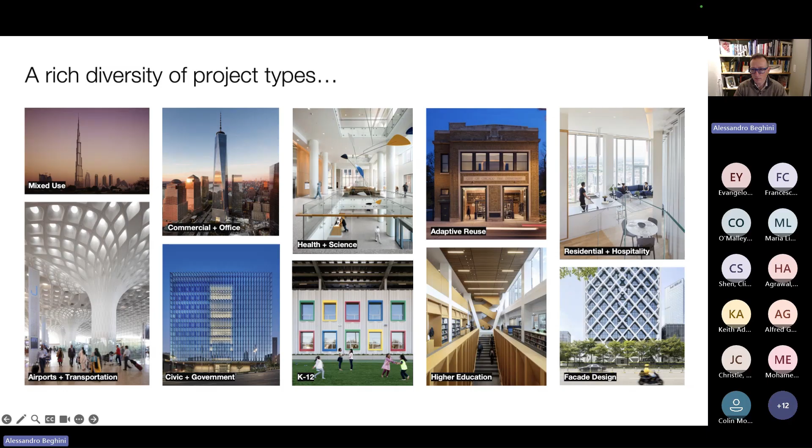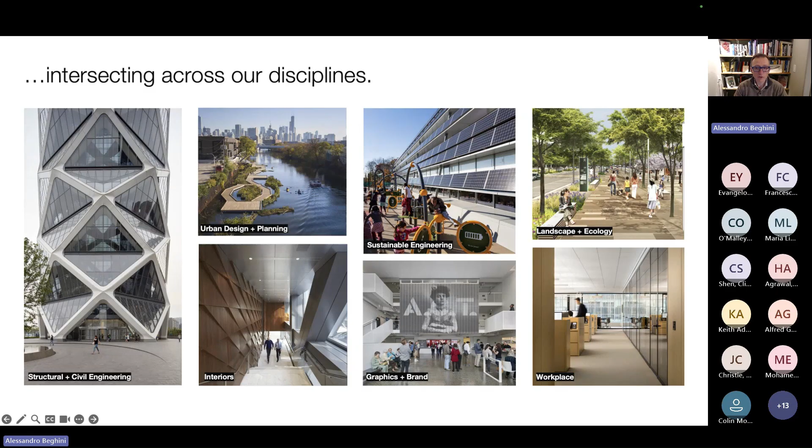Our portfolio covers a variety of types. You could be working on a very large airport, like this picture of the Mumbai airport, or on courthouses like in Los Angeles, or renovation projects. So really a variety of projects, as well as a lot of different experiences from the different disciplines under the same roof, including structural engineering, which is my department, and then architecture, sustainable design, and graphics.

So just taking into account the lens of our approach to design, let's dive into the project I'm focusing on today, which is the Los Angeles County Museum of Art.

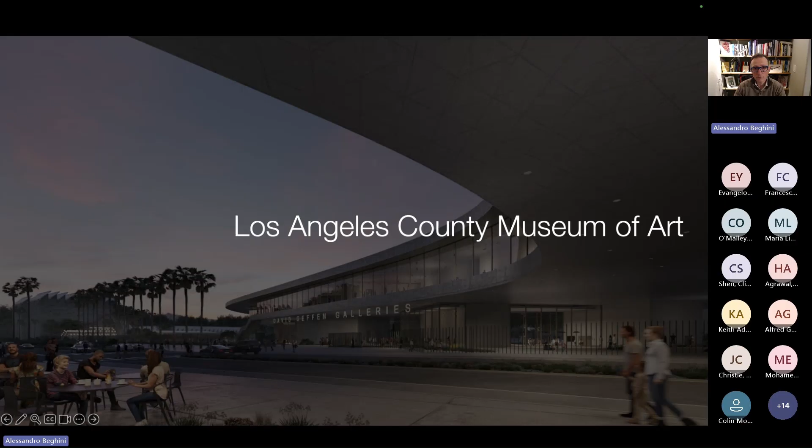So this is a picture of the upcoming building within the context of the LACMA campus. It has actually been many years in the making. I was mentioning earlier about 10 years we have been working on this project, and it is just one of the latest additions to a number of new structures that were added over the years.

You can see them here scattered on the campus. There's the Resnick Pavilion, designed by Renzo Piano, and then the one that is spherical in form, which is the Academy Museum of Motion Pictures. And you can see the LACMA building for the permanent collection is at the center with that amorphous shape.

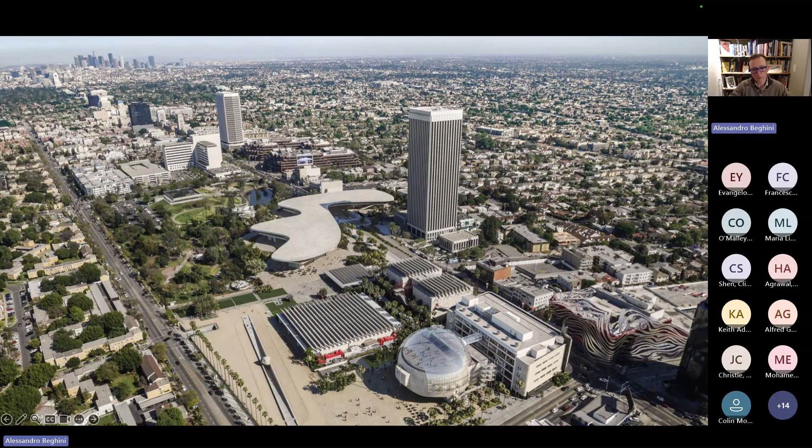If you go back a few years to 2006, this is what the LACMA campus looked like back then.

There were a few pre-existing buildings which were demolished prior to the starting of construction. Essentially, what the building I showed you in the previous picture occupies is the area in blue, in addition to crossing the street, Wilshire Boulevard, which is a major artery in the city of LA. So it crosses that street on the south and goes into a portion of what was previously a parking lot.

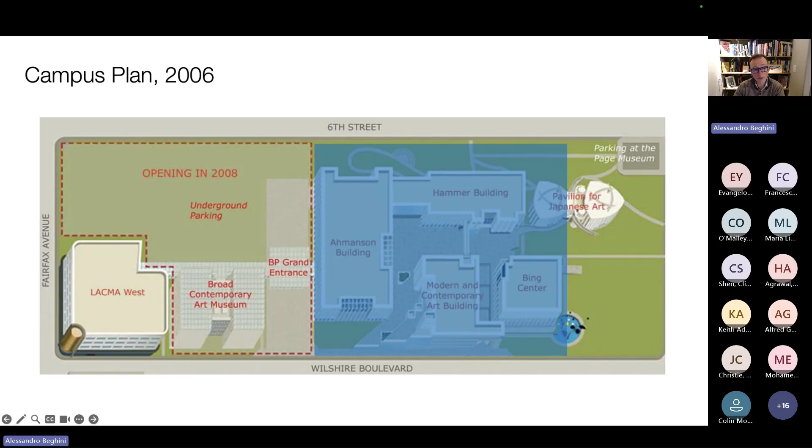The original complex included four buildings that had multiple functions back then, but that became a bit obsolete and weren't really useful for the museum, and that's the reason why they decided to move on with this new building for the permanent collection. The project really started with the search for the architect, and Pritzker Prize winner Peter Zumthor was selected as the design architect for the project.

So maybe a few words about Peter Zumthor and his approach to design. First of all, a few major notable projects by Peter here, and his design philosophy really centers on creating deeply sensory, atmospheric, and emotional spaces that connect with their specific places. He's literally looking at the materials, the history of the place where he's designing. He wants to emphasize the experience, and there's also a lot of attention to craftsmanship and honesty of material.

So it's a very interesting perspective, and he really believes that architecture should engage all the senses, using textures, light, sound, creating this holistic experience. And the design process itself took about 5 to 6 years before we could actually start the construction.

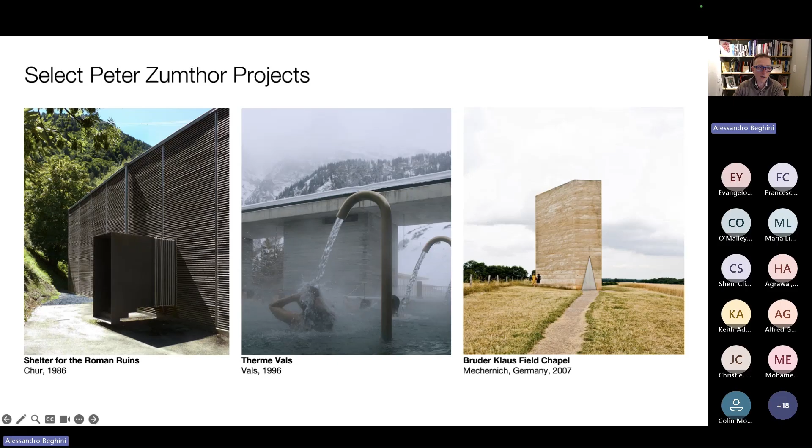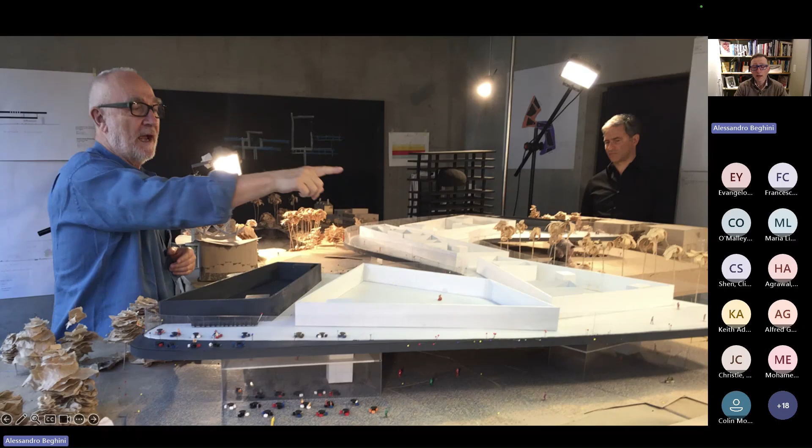So it was a very meticulous process, and it was really interesting working with him because the approach itself is very much rooted in physical models. There's a lot of work with paper. And so the use of physical models and paper allows for a very deep focus and also interesting spatial explorations.

Because when you're in front of a model, you can see very clearly if there are opportunities for something that you may not be able to capture when you're looking at just a digital model through your screen. And this is just a picture of Peter in his studio where he places the models, very large scale models, on top of stilts so that they're actually at eye level, so you can see them from the point of view of an observer who would be experiencing the museum when constructed.

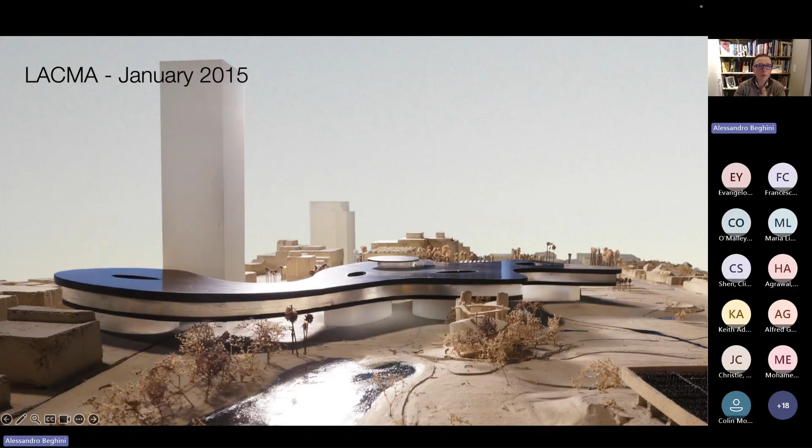The design process went through a series of iterations. This is one of the first models we worked on, and you can immediately distinguish a few important features of the design. The design concept features this elevated single-level art space, which sits atop the porous ground floor, and therefore eliminates any hierarchy in the visitor experience, which is different from more traditional multi-story museums and from what the older buildings that were there for LACMA were.

Essentially, when you typically visit a museum, you could go and visit, say, the Impressionist painting, so you go to the Impressionist room, and then you want to see Japanese pottery. You may need to go, maybe the Impressionist is on the 10th floor, need to go down to the ground level, go to a different building, go back up another building. This automatically sets a hierarchy because usually what's on the ground floor of a museum is what's most visited, because it's most accessible, right? People will go there.

But here, by placing everything on the same level, there is no more that hierarchy, and you can easily access, once you go up on that single level, all the collections and all the pieces and all the exhibitions at the same time. So it's a very interesting approach to the experience of the museum.

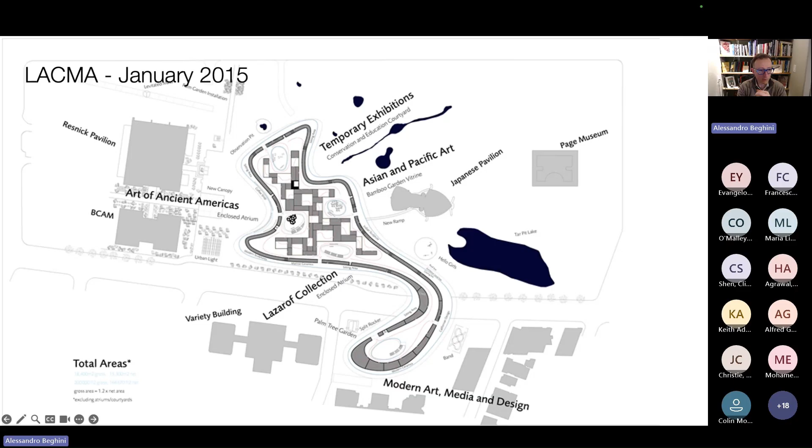This is a plan view of that same concept, with a series of boxes that are clustered around the center. Another important feature of the design is that the building spans across Wilshire Boulevard, as I was saying earlier. Wilshire Boulevard, on the south side of this building, is really a major roadway in LA. What that does is make the building partly a building, but partly also a bridge, because you're spanning this major road.

So, as I was saying, we just saw one of the first iterations. There were several iterations after that. For example, here is the iteration after one year, and you can already see the quality of the plan is very different from the first one. Now those boxes, those towers that support the main exhibition level, are very different—they're polygonal, first of all, and they're more scattered in the plan. It's a very organic nature that is developing.

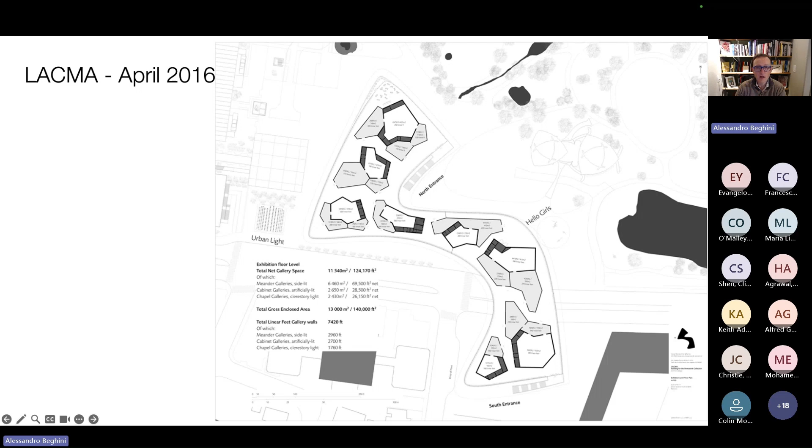Looking at the same scheme in elevation, you can see what we call art houses—these are the buildings that essentially protrude through the exhibition level, which is the one elevated, and they house the vertical transportation elements: elevators, stairs, mechanical shafts. The building itself, with the exhibition level and the roof, has components spanning between these art towers or cantilevering off them, in addition to the bridge spanning across Wilshire Boulevard. So iteration started in 2015, then we moved on in 2016.

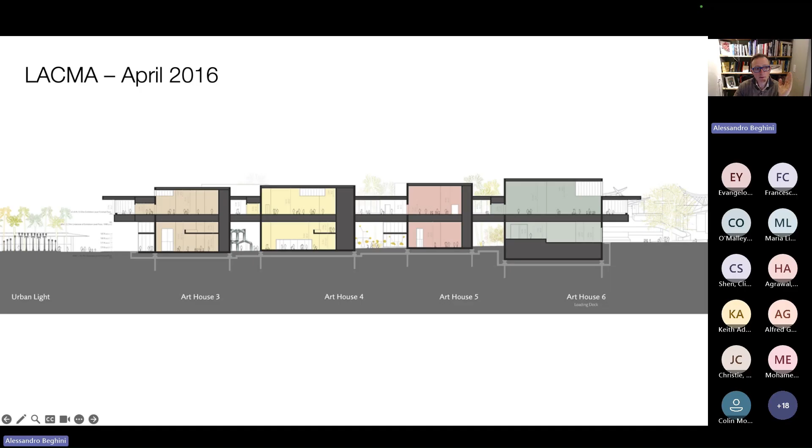Let's look at the next iteration—this is the last one. There were some other iterations in between, just to give you a flavor of the iterative process and refinement we went through for the design. This iteration is from the summer of 2018, where you can see that from the polygonal shapes, now we are in rectangular shapes—a more refined form of the perimeter, the edge of the exhibition floor.

What you can also see is that not only do we have what we call art houses, the main towers that go down to the ground, but also scattered throughout there is a series of what we call chapel galleries. Let me go to the next one, it'll become more clear. Essentially the towers, the boxes that actually reach the ground, are the ones filled in here, and they're color-coded by what we call neighborhoods.

Connected to them is a series of boxes which are not filled—again, different colors, but connected back to the main towers. The purpose of these empty boxes is to stiffen the sandwich of the exhibition floor and the roof, to make sure that, given the long spans we're having here, we can control the deflection and design for strength. Purple is a neighborhood, cyan is a different neighborhood, yellow is a different neighborhood, and so on.

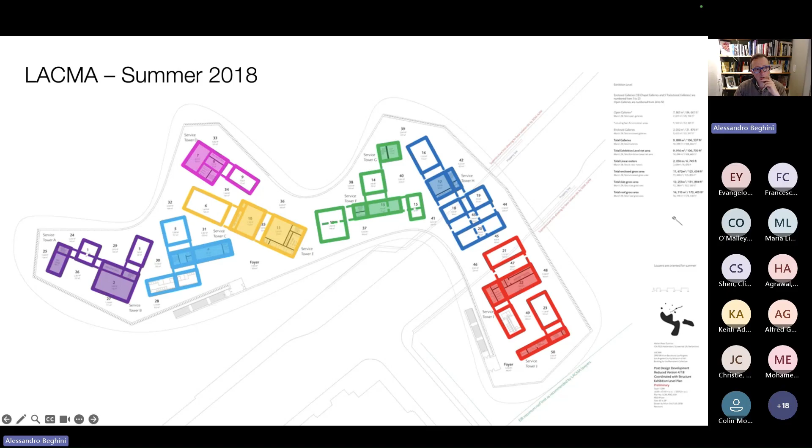So, given these architectural iterations, in parallel there were several structural iterations that came with them. This is a very simple, early structural section, but it's still very powerful because it really explains the fundamentals behind the concept of the structural system.

What you can see here is that we have these reinforced concrete towers, made up of reinforced concrete shear walls that represent the primary lateral system for the project. The towers come down and sit on top of isolators at the very bottom, which provide the building's seismic isolation. We'll talk a little bit about seismic isolation in a few minutes.

Obviously, as you can imagine, we are in Los Angeles, very high seismicity, and we are talking about a museum, so important, invaluable content inside. To protect it, we made the decision to go down the route of seismic isolation.

The tower with the shear walls represents the lateral system, and the gravity system uses post-tension reinforced concrete to support those very long cantilevers projecting from the towers. So we have these conditions spanning across multiple towers and then the bridge across Wilshire Boulevard.

The floor sandwich itself, or the roof system, is composed of a top and bottom slab connected by vertical reinforced concrete ribs essentially. So the sandwich itself is very deep and provides enough stiffness.

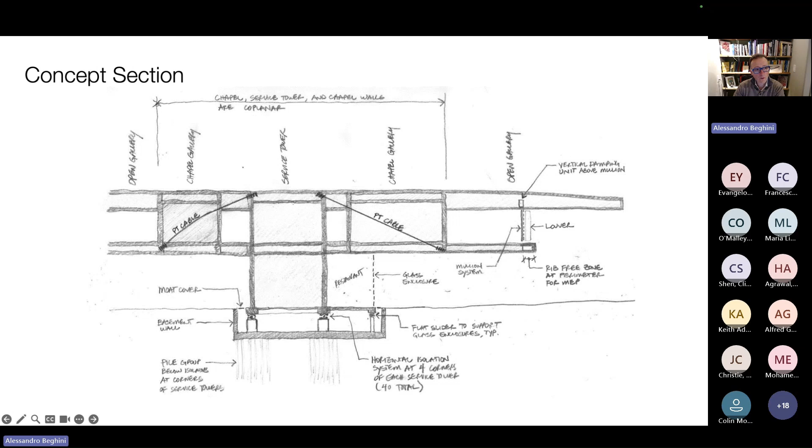This is another image of the final plan geometry of the building, which ended up, from a structural point of view, being a two-way system of interconnected ribs.

What you see in this diagonal pattern is all the ribs connecting all the way across the plan, which is a very large structure. Scale-wise, each of those diamonds is about 8 to 10 meters in dimension, and overall the length of the building is about 200 or so meters. So very long, with cantilevers that in some of the worst conditions could be up to 30 meters, which is very significant and obviously requires this very robust structural system.

You can see also that this two-way grid of diagonal ribs covers the entire plan and is coordinated with the geometry of the towers and the chapel gallery. So everything is working together geometrically to create and support the architectural vision.

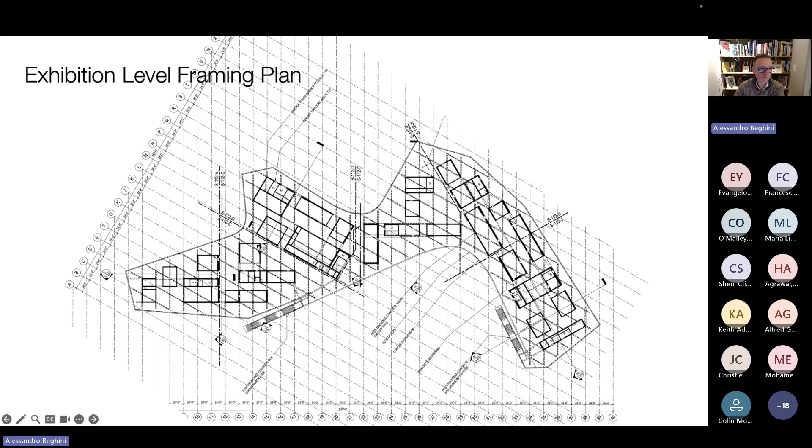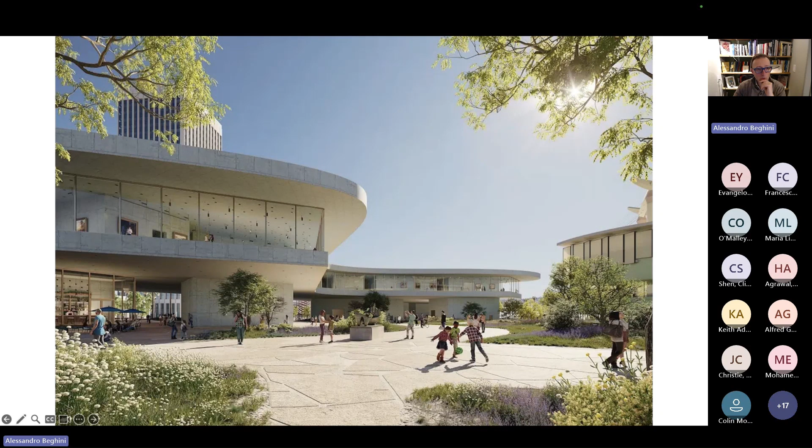Let's take a look at, obviously, I want to mostly focus on some of the structural aspects of the project. There's a lot in the architectural discussion that could be said, but let's focus more on the structural aspects. There are three big chapters from a structural point of view we can talk about today: first, the post-tensioning and the gravity system; second, the lateral system and base isolation; and third, I'll show you some of the most meaningful construction phases and sequencing for the project.

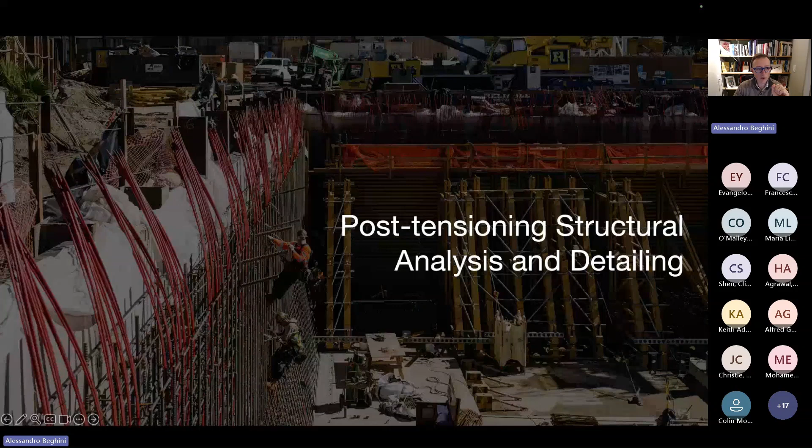So the first step, looking at the post-tensioning that was used in the project for the gravity system—this is just a picture from our analysis model.

We used LUSAS as a software to analyze the post-tensioning. We actually had two primary structural models. The LUSAS model was used for the gravity system and the analysis of the gravity system, and then we had an ETABS model, a completely separate one, which was used primarily to do the lateral system analysis.

In the LUSAS models, in order to do analysis of post-tensioning, you need to account for a number of factors. In particular, when you deal with concrete, what you're concerned about often with long cantilevers is really long-term deflections. So you need to be able to simulate creep, shrinkage, pre-stress losses, and a number of other phenomena that occur when you're dealing with PT.

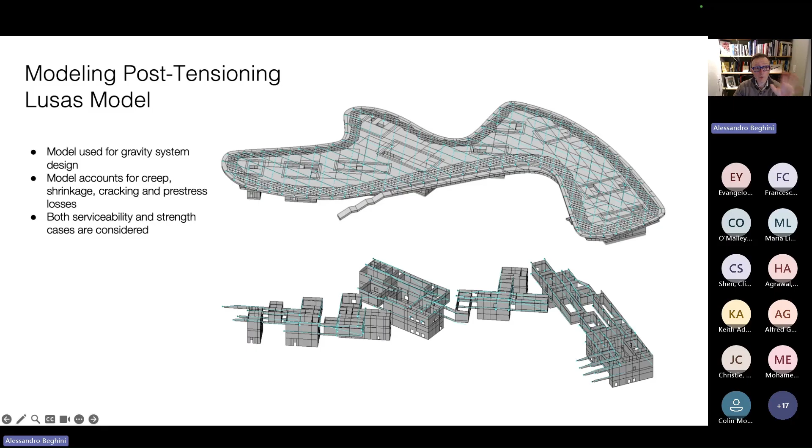If we want to break down the PT system a little bit more, this section is helpful in understanding how the whole system works. First of all, an important aspect of the structural system is the extensive use of the balanced or double cantilevers, where essentially whenever you have a cantilever on one side of a tower, we try to balance it with a cantilever of similar length on the opposite side. So that when you have a balanced cantilever, you just don't have a net moment that is going into the tower and causing a net moment at the base of the tower itself.

Not only that, but the post-tensioning cable bundles are introduced inside the shear walls. You can see here those black lines are essentially post-tensioning cables. So we have the post-tensioning cables inside the shear walls to counteract gravity forces. These post-tensioning cables are laid out according to the principal stress directions inside the wall. So an analysis is conducted to understand what the natural flow of forces will be inside the walls, and then you would follow that natural path in order to lay out your cable inside the wall.

As you can see, there's also post-tensioning cables that stay high, either high in the roof sandwich or high below in the exhibition floor sandwich, and those are there to support the cantilevers and the long spans within the building itself. So there is a clear hierarchy, and that hierarchy is really organized.

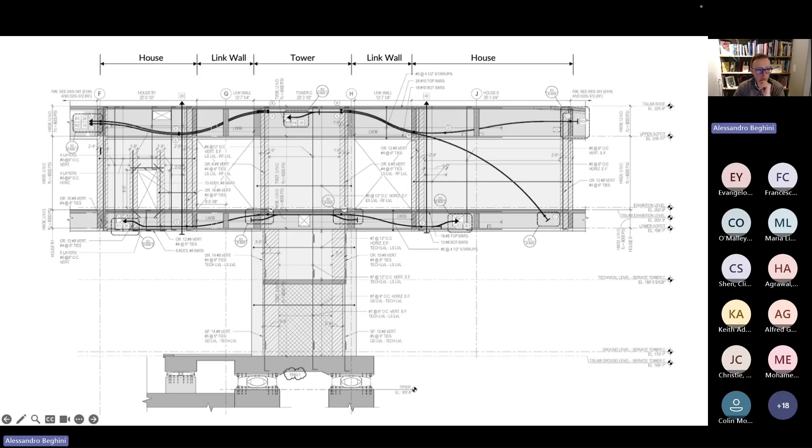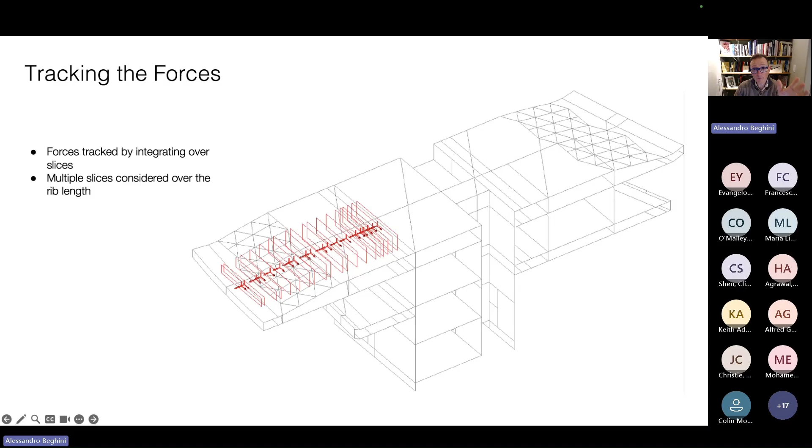Now, how do we design the PT? Well, we take our LUSAS model, and what we do is really set up a series of sections. For example, say that you need to design a rib within the sandwich of the roof - you would set up these red planes, a series of cross sections that you integrate along the beam, which would allow you to know what the forces are at each point, say every meter or 2 meters along that beam. Then you would extract them and design them as part of a bigger process or script that allows you to take every single one of them and process them.

As I said, one of the key aspects in the design has always been, from the very beginning, the long-term deflections. This is just a contour plot that shows you a heat map of deflections within the building, extracted again from that LUSAS software.

When we look at long-term deflections, we are looking mostly at the deflections that are caused by the self-weight of the structure, together with the sustained loads - what we call sustained dead loads, which are superimposed dead loads on the building - and whatever would factor in and should be considered for this long-term view of the project. Obviously you're looking at a very long span, so for example this is 3,000 days, very far in the future, and needs to account for creep and shrinkage.

You can see here that the highest cantilevers, shown in red, have the highest deflection, located at the bridge across Wilshire Boulevard where the cantilevers are longest. In particular, there's a couple of spots on the south side of the building showing 2.33 or 1.93 inches, in the order of 60 to 70 millimeters, at the longest cantilever and the bridge. Those immediately became the hotspots we had to pay close attention to in order to mitigate the long-term deflection.

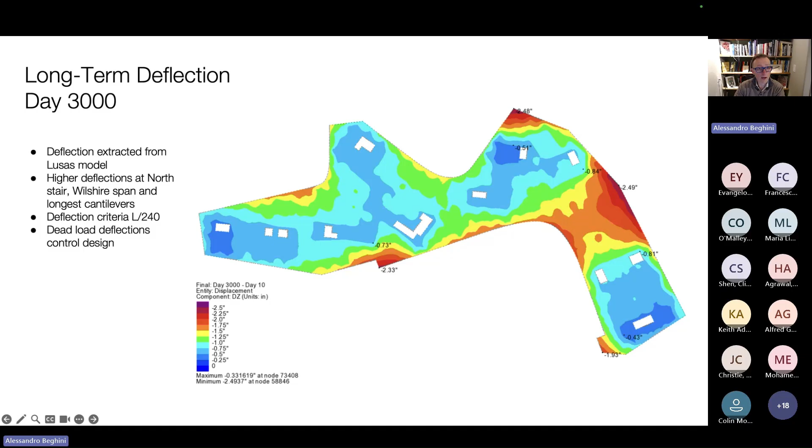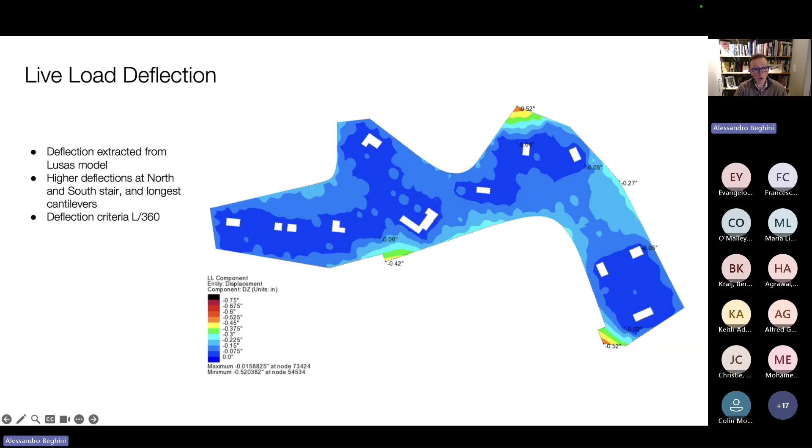In addition to monitoring the long-term deflections, we also looked at immediate elastic deflections. Those have more to do with live load deflections, which come from occupancy—people occupying the building, visitors experiencing the building. But those loads are typically not sustained, meaning they're short term, because they're not always there and not always imposing a load on the building. Also, those live loads are much smaller. So really the biggest component of load here is coming from the self weight and whatever art content is inside the building.

When we look at deflections, the absolute deflection—those 60 to 70 millimeters I mentioned earlier—is not the only thing we look at. We need to also think about the systems that go into the building, for example the exterior wall system, the glazing that we saw in those interior renderings. The glazing itself is sitting at the edge of the exhibition floor.

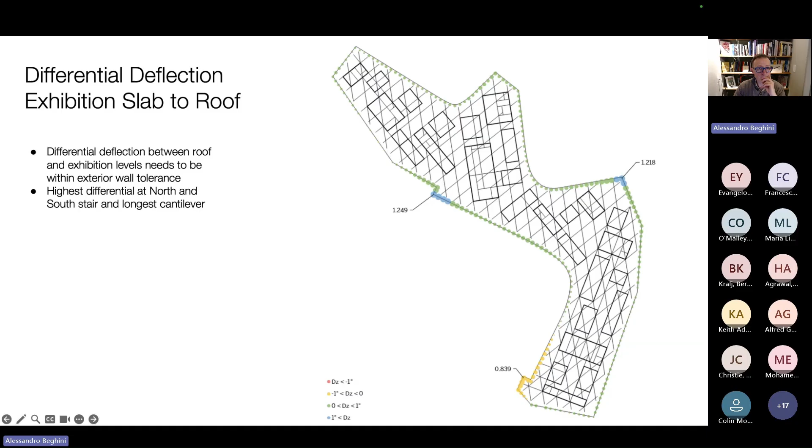For the deflection, in order to compensate for the large deflection, we introduced camber. The camber program essentially means that instead of building the slab or the ribs flat, you build them a little higher, so that over time it flattens. So the maps we saw earlier, the heat map which had deflection up to 60, 70 millimeters—eventually, if you build a little bit higher, it slowly comes down over time and becomes flat.

We produced maps that could be used by the contractor for a series of points which we agreed upon. We agreed that at any one of these points, as you can see in this bubble plot, a bigger bubble is a bigger camber, and we provided the contractor a camber ranging from 3 millimeters to 20 millimeters. So essentially, everywhere the formwork was at a different elevation by a few millimeters, so that when they cast it, it would be cast at this higher elevation, and then over time it would come down.

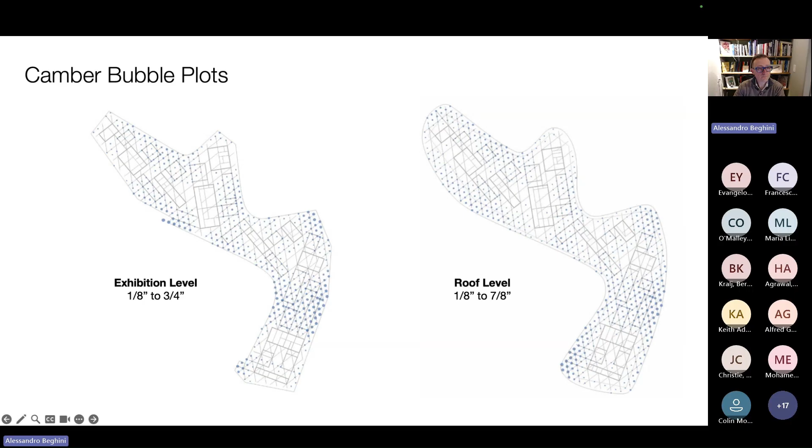For the bottom slab, you see the soffit, and in that cavity is where all the mechanical equipment and other MEP services will run. So it was very close collaboration with MEP consultants—the mechanical engineer, electrical engineer, and plumbing engineer—in order to make sure that everything could fit.

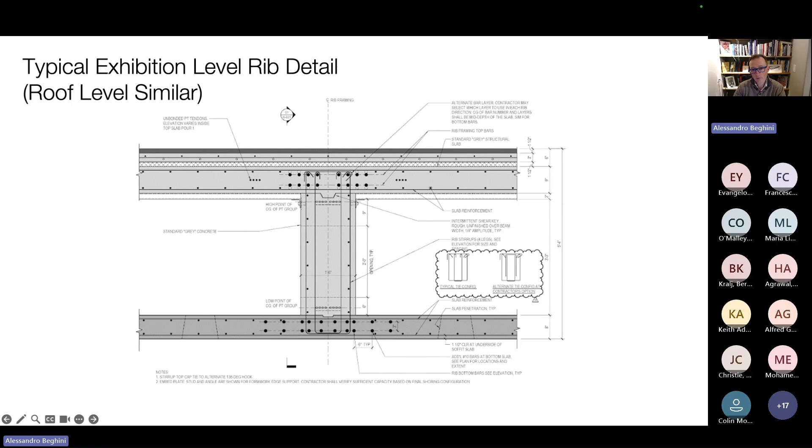Not only that, but once you start running services within this cavity, you also need to make sure that you have openings in the ribs. We saw in the plan earlier that we have these ribs running on a diagonal pattern, covering the entire floor plan, so we needed to make sure these openings were properly coordinated and detailed. All these black lines represent the proper detailing with trim bars and strengthening of the corners of the opening, making sure everything is accounted for.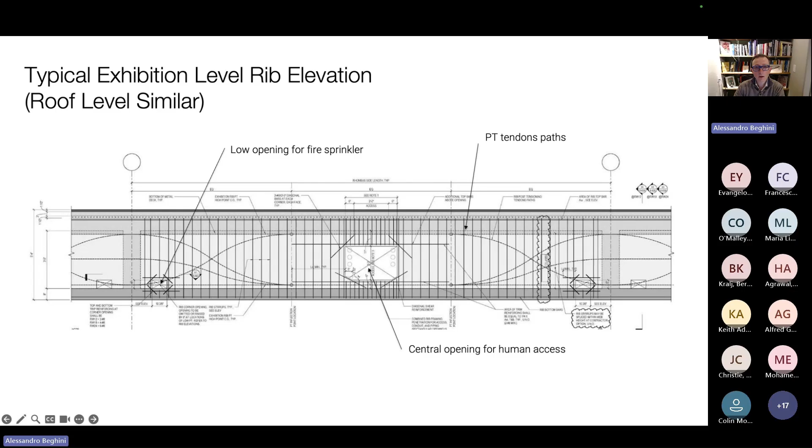So the next chapter I want to talk about is seismic protection. As I was mentioning, seismic protection was one of the key aspects of the design from the very beginning. We're designing a museum with invaluable art content inside, so how do we protect the art from the large seismic forces occurring in the area?

After a series of discussions and back and forth, we decided eventually to go with triple friction pendulum bearings for a horizontal isolation system. These are very large bearings, probably amongst the largest ever fabricated, about 3 meters in diameter, capable of 1.5 to 2 meters of displacement. And there's not only horizontal seismicity, but also vertical seismicity, so we also introduced nonlinear viscous dampers for the vertical vibration.

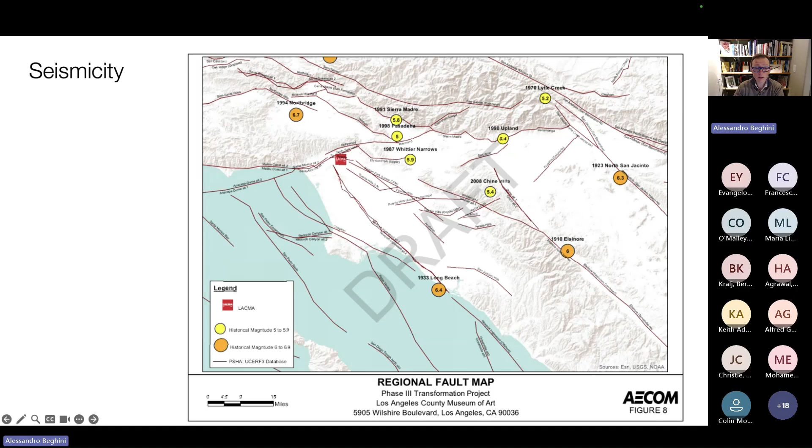If we had gone down the route of a fixed base building, our period would have been in the order of 0.2 to 0.25 seconds or so - pretty rigid, because essentially it's a one-story structure with just the one exhibition level. At that period, you would have been in the order of 2.5 Gs of acceleration, which is pretty considerable. Now imagine having fixed connections - what that would do to the art.

In case an earthquake would come, you would have to base isolate every single art piece independently within the exhibition level. So why not introduce the base isolation system instead? By doing that, you're effectively lengthening the period, and when you lengthen the period, the forces experienced by your building go down dramatically - from 2.5 down to less than 0.25 G. All of a sudden your building is protected, the art is protected, and it was the best solution we went with.

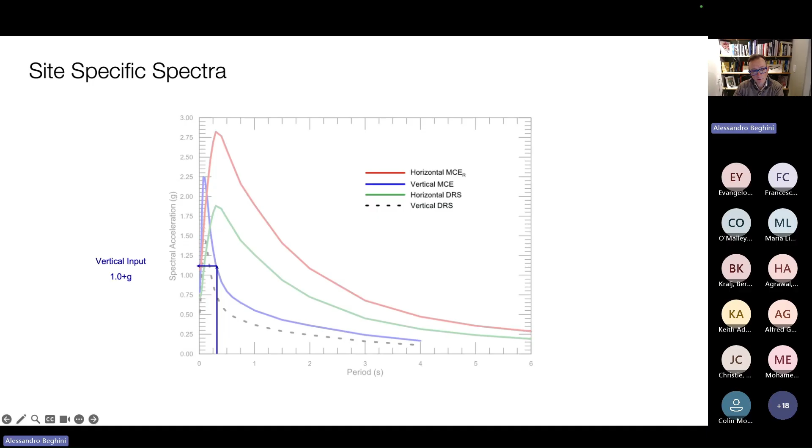What happens when you isolate them? What happens when you couple them using vertical dampers?

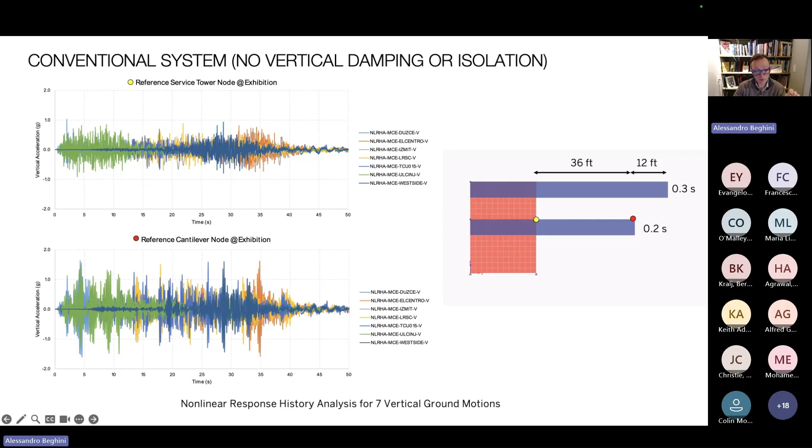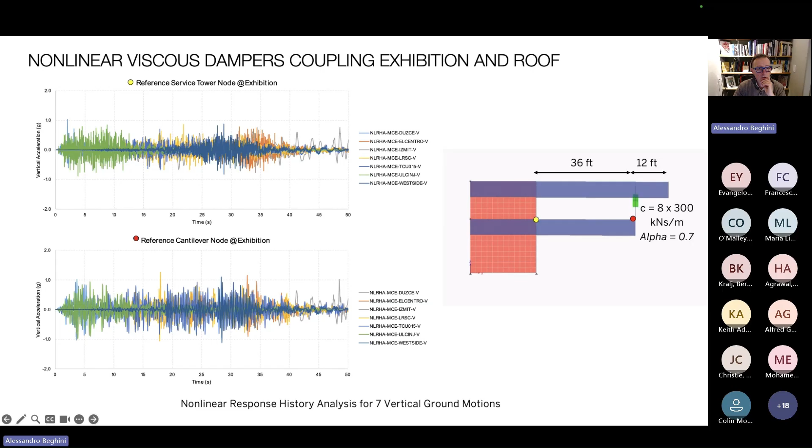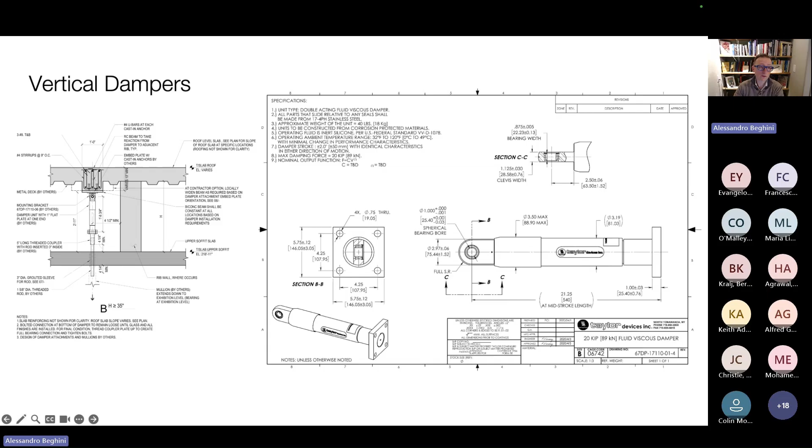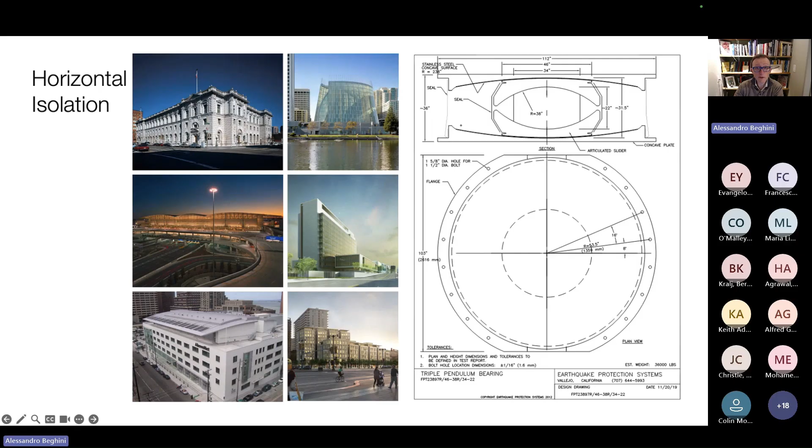The other important aspect is the horizontal isolation. Being here in San Francisco, we have experience using base isolation in multiple buildings. The system we went with is triple friction pendulum isolators, and you can see here some of the testing that was conducted. The isolator itself is made up of a series of plates that can slide relative to each other.

The three plates are there to mitigate different levels of earthquakes or seismicity. If the seismicity is low, the first plate is engaged, and as the seismicity becomes bigger and bigger, that internal steel element touches the edge, the rim of the subsequent plates, and engages it. So there's this system of plates that allows for large movement.

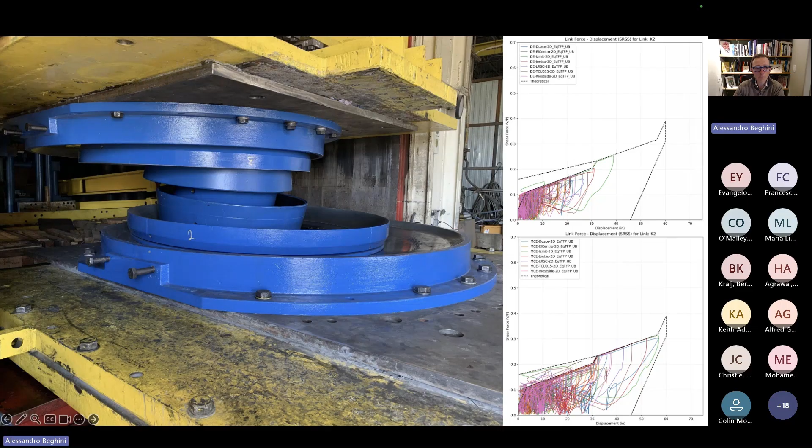This is a picture of the analysis conducted in ETABS. As mentioned earlier, we had two models at any point in time: the ETABS model used for the lateral analysis, the global model, and the LUSAS model mostly for the gravity system.

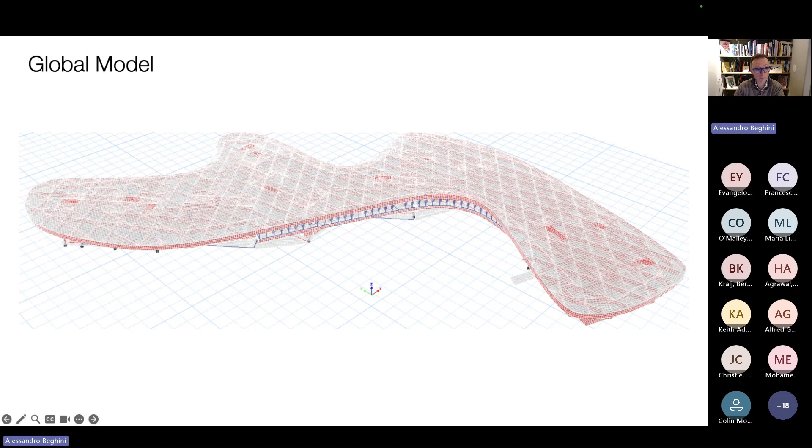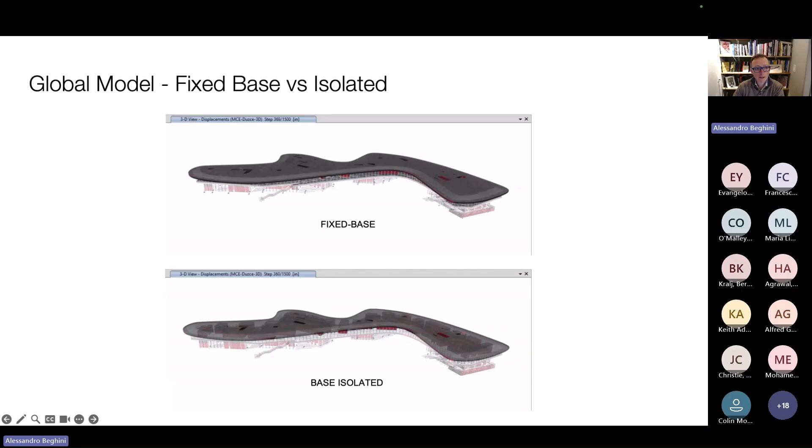If you compare the fixed base model with the base isolated model, you can see how the behavior is significantly different. In this video, the entire building as a unit is sitting on top of these isolators. We had 40 isolators because we had essentially 10 towers. Each tower is a box, and at the corners of this box there are four isolators. You can see here very large movement, while the fixed base model is essentially very rigid and is transferring all the loads back to the art and the interior content.

As part of the process, we monitor the performance of the system. At any point in time, we were looking at the design earthquake, and the maximum, at the MCE level, maximum earthquake. We were monitoring how we would be able to reduce the drifts and the acceleration.

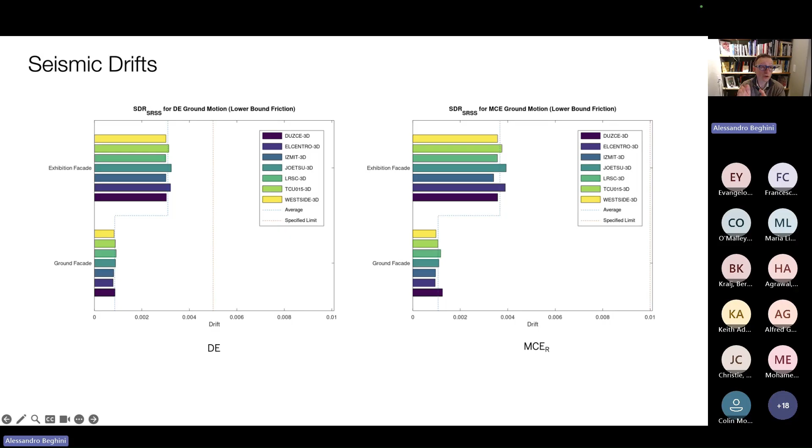The drifts were significantly reduced by using the base isolation, in particular the differential drifts that would occur between the ground level and the exhibition level, and also the acceleration. The floor accelerations were significantly reduced, and that turned into a significant benefit for the entire building.

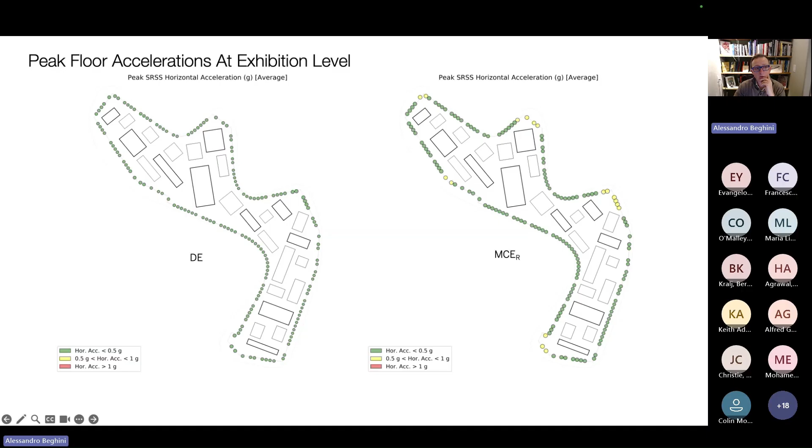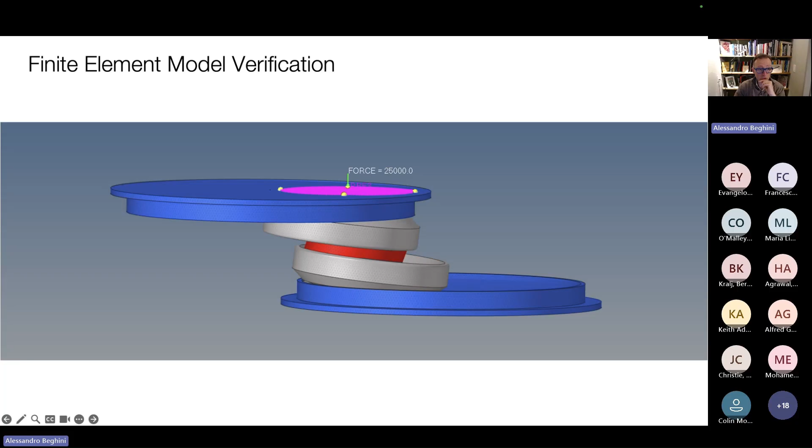Using base isolators, we went back and forth with the fabricator of the base isolators, but we also had to validate that these isolators could take the large forces that would occur on them when they are eccentric. You can see here a picture from our finite element model showing the isolator in an eccentric position. As you can imagine, you have this couple that is a very large force going through the system, and you need to ensure that the isolator can actually take it.

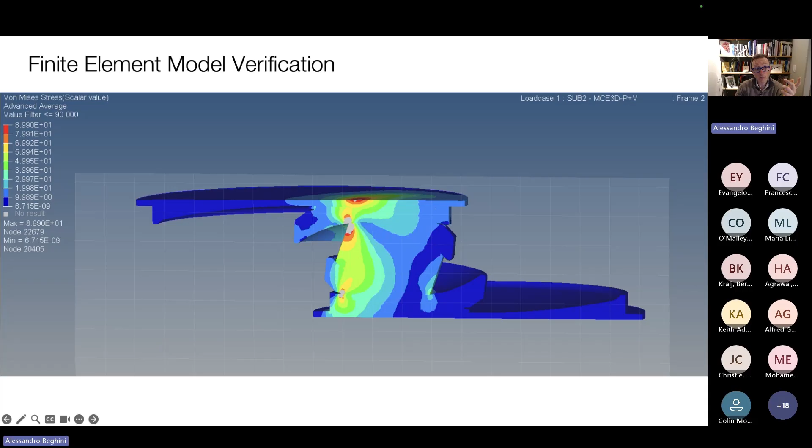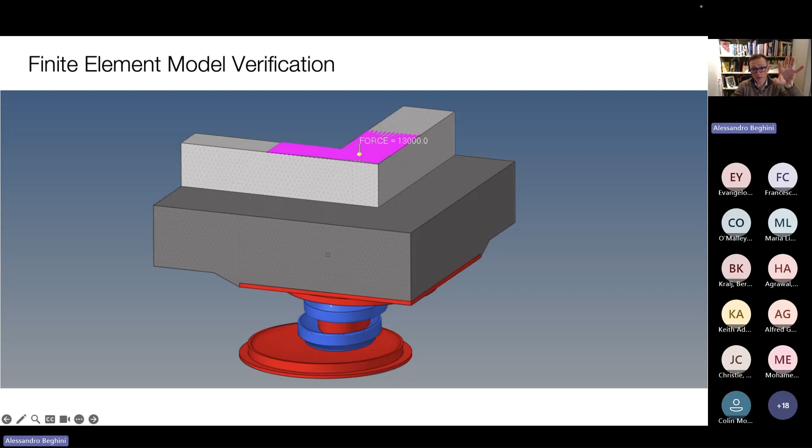We loaded these beams with that eccentric load, that eccentric moment, to ensure we would have a proper load path through the isolator. The isolator itself at the base sits on top of a pedestal, so we need to take that load from the top all the way down to the pedestal. We did a very detailed finite element analysis to understand the load path, and this contour plot shows the transfer of continuous load from the shear walls above through this very thick beam connecting the isolators down to the pedestal itself.

Then taking that significant load and converting it into detailing - there has to be enough rebar to take these significant forces all the way down, and modeling them. So there's the drafting and 3D modeling of all the components and all the rebars, another important chapter of the conversation, to make sure everything fits when it's constructed.

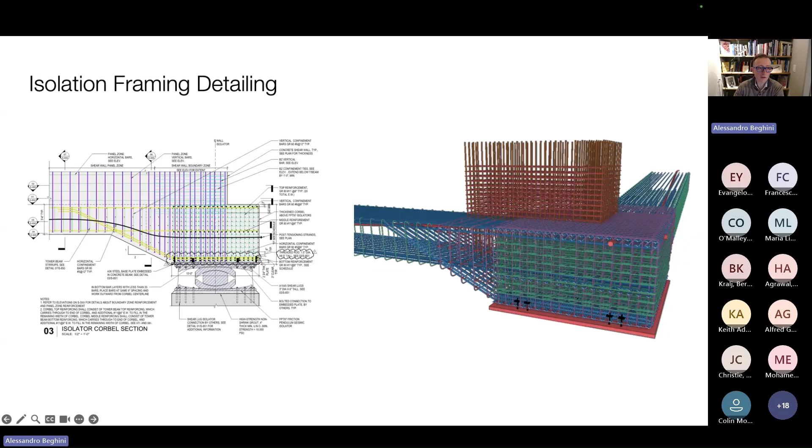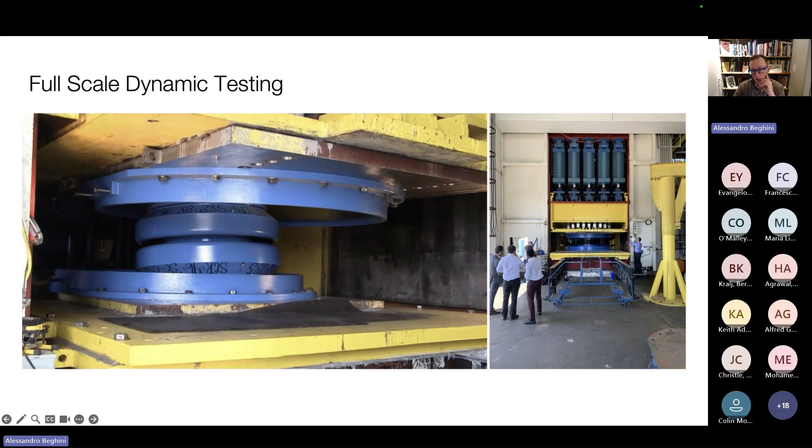We also did testing - full-scale dynamic testing of the isolators. This is at the facility of the fabricator of the isolators, and you can see on the right the scale that was used. These are some pictures from the fabricator's facility - it's very large, these isolators. And on the right, a couple of our engineers back on site at the time when this was implemented.

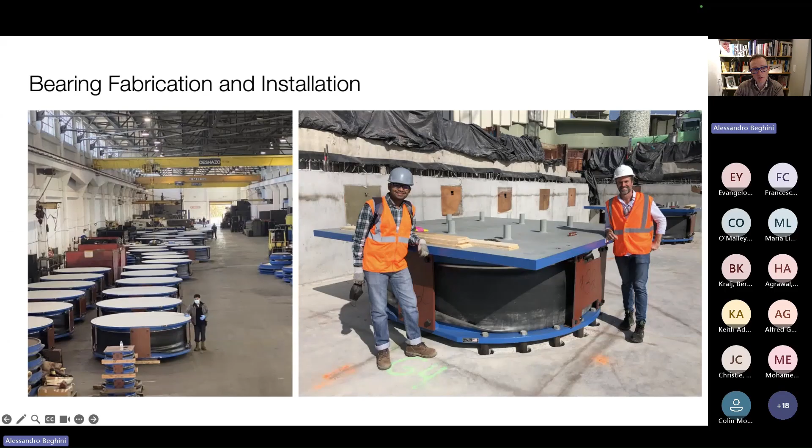For the last 4 or 5 minutes, I'd like to dedicate some time to the construction itself, the construction sequence, and a couple of pictures of construction very quickly. As part of construction, another important chapter is how do you actually build a building? What is the sequence of events that need to occur? What do you build first? What do you build second? When do you stress?

These are all questions that need to be considered very carefully, because the sequence of building affects the way things are shrinking. Concrete shrinks, so you typically need to allow for gaps and joints in order for the building to breathe. Because if you lock the building too soon, what would happen? Concrete cracks - even a slab, when it's shrinking, if you don't allow it to breathe, it would crack.

So a lot of consideration went into how we sequence our casting - what is the sequence of pouring? For example, a slab - we have different slabs here, we have 4 slabs all the way up. And how do we leverage the isolators themselves in the process of building to allow it to breathe, since there is no joint? This is a very long building, 200 meters plus, without any construction joints to let it breathe - it's just one monolithic building.

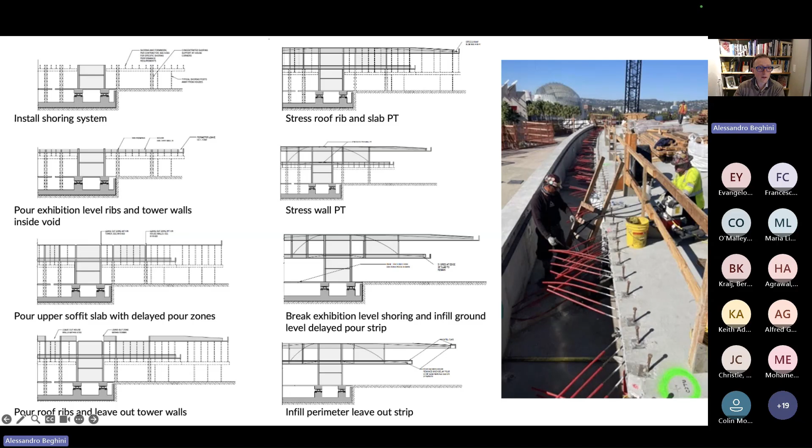So we decided to leverage the isolators and the sequence of locking and unlocking them. When they come to site, the isolators are locked so they cannot slide. But as soon as you unlock them, they can actually slide. So if the building above is shrinking, moving, and breathing, these isolators allow it to breathe and move and shrink accordingly.

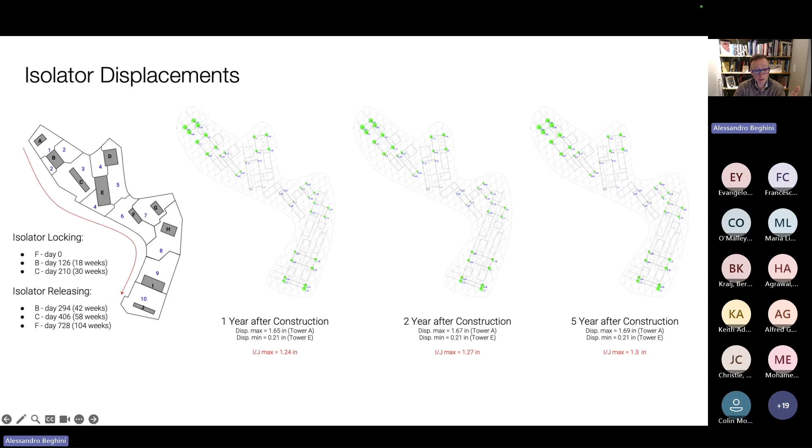We really studied closely what the sequence was - you can see it here, if you lock the isolators at tower F, what would happen? How much movement would you get, and in which direction does the movement go relative to the shrinking occurring? We monitor the shrinkage not only during construction, but after construction - what happens 5 years after construction - and we even put instrumentation in place.

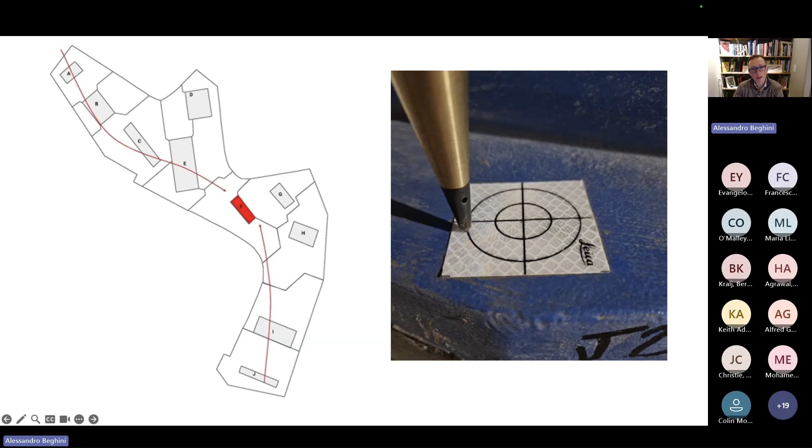The whole idea is that as you're unlocking the building, everything is shrinking towards F, and even the furthest out tip of the building will move towards that central tower. We had these tools in place to monitor that the shrinking was occurring, and to our satisfaction, it occurred in the sequence and magnitude we expected, with larger movements further away because those elements are further away as we're shrinking, converging towards the center.

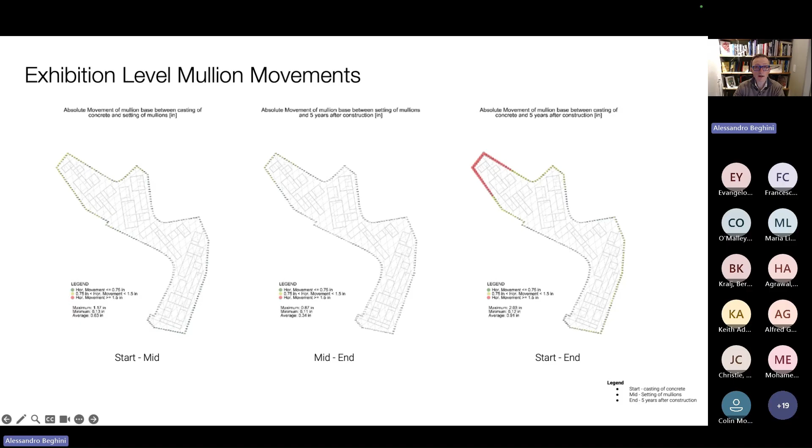You can see here there are dots showing the relative displacement. As we monitor this movement, we are also monitoring the relative displacement. The exterior wall is very sensitive to the detailing and how the detailing was conducted, so we looked at the numbers of relative displacement to ensure that the detailing of the exterior wall system could take this differential.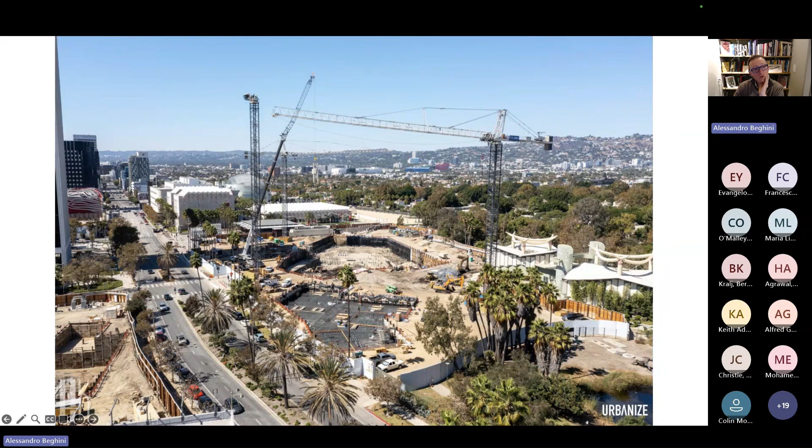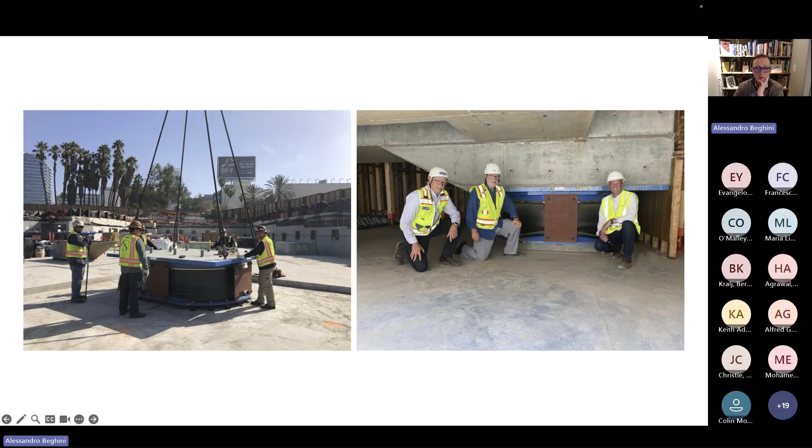Throughout construction there were obviously key moments. You can see here when the first isolator went in, and this is Peter wanting to take a close look at the isolators when it was installed, together with some of my colleagues from the structural group. You can see here again the scale of the isolator.

There's some beautiful imagery you can find online, and this is just a picture that I found online. You can see in red, the red lines are actually the PT tendons, and you can clearly see also visible the ribs, the diagonal pattern of the ribs.

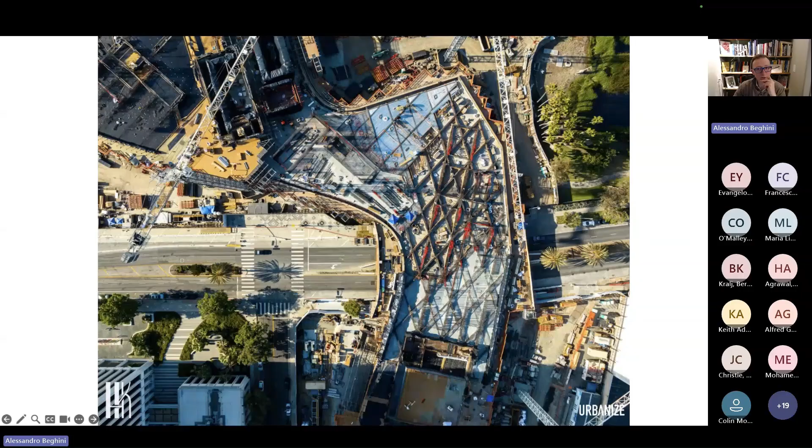On the building during construction, you can see here again, these are all PT tendons, and those are the tendons that would dive into those shear walls, as was shown in some of the previous sketches. On the left, those are PT tendons within a rib.

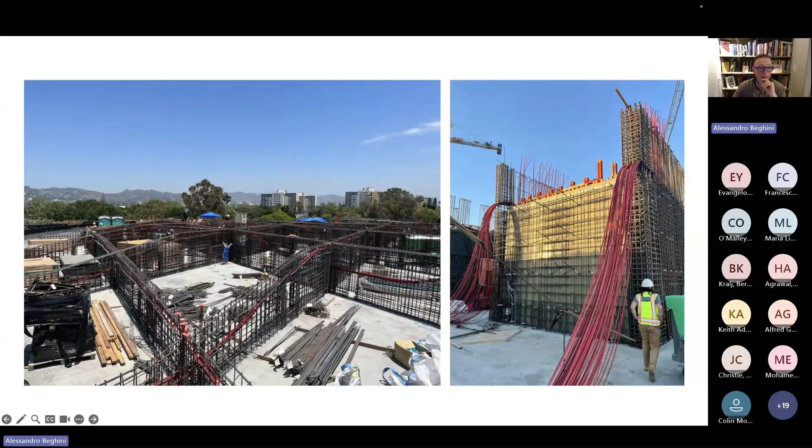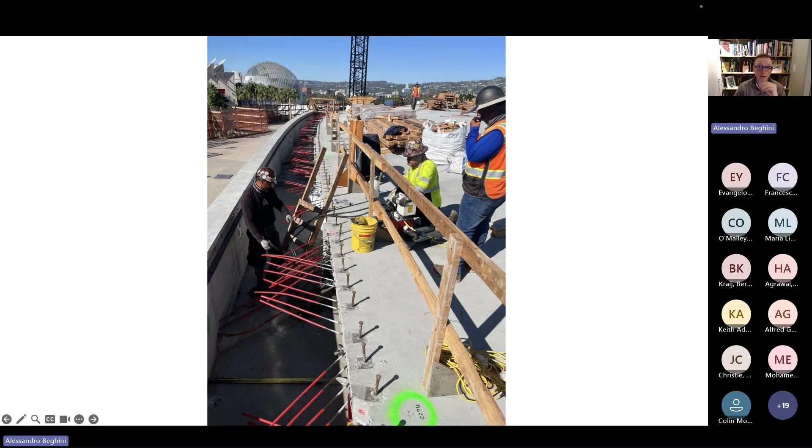And then every one of these PT tendons, as part of the construction sequence, was stressed. You can see here an operator on the edge of the building with a machine, a jack that grabs one of these tendons and pulls it to get to the prescribed force of the tendon. So as I said, we're very close to opening.

The building is intended to be open in April. So these are some of the pictures, some of the latest images you can find online, of the building.

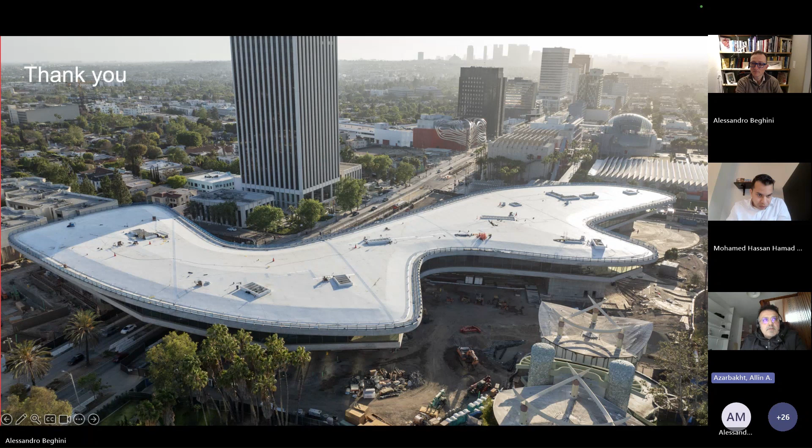I guess it was time history, but I'm wondering whether it was linear or nonlinear time history, and according to which code you performed it. The other question would be, I'm interested to know how you dealt with the rotation component of the isolators, because it's kind of multi-staged, multi-layer, a pendulum kind of rubber and isolator. So how did you consider the rotational effects in the time histories, particularly for the isolators?

Because rather than translation, if there is rotation, the top plate and the bottom plate of the isolator can rotate compared to each other. And what happens there?

And have you considered that in the time history analysis somehow, or any idea about that? Thanks. Sure, sure. Thank you for the question.

So, the type of analysis. Most of the analysis, the lateral analysis, was done in ETABS software, and there are specifications given in the ASCE 7 code, which is the US code that controls seismic design, for the analysis needed for isolators or additional damping devices. So everything was done in ETABS.

We also had a peer review as part of the process, and the work has to be peer reviewed once we go down the route of what we call performance-based seismic design, as opposed to a prescriptive design.

If you do prescriptive design, you just follow the letter of the code. The code tells you this is what you need to do, and there is a route there. Once you go down performance-based seismic design, there is a completely different route, and you have a peer review.